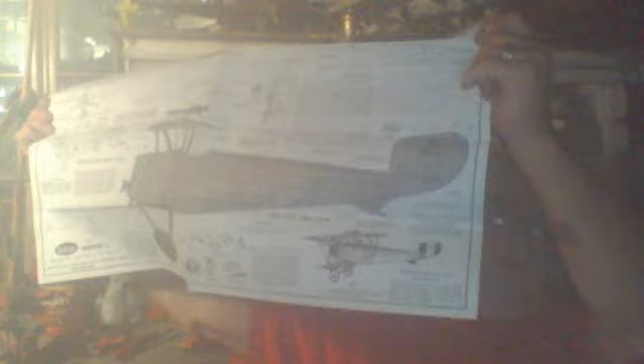Okay, starting out with the instructions. This airplane is a very big model—as you can see, most balsa wood kits are not small. The wingspan of this kit is 24 inches, the fuselage length is 22, and this is a Nieuport 11.

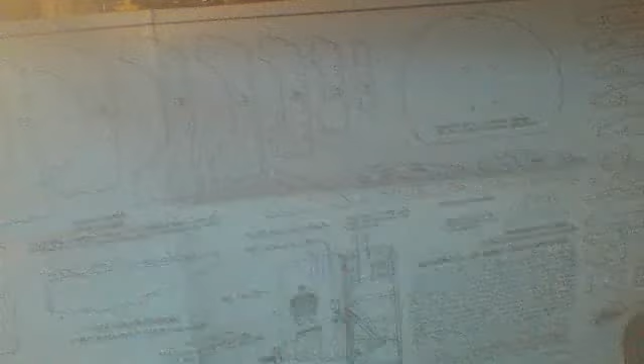I think the scale of this model is 1/12 scale. And on the plans right here, as I mentioned, as you look up here on the top, right across here—these are what I'm talking about. These are templates. If you snap apart or break apart some parts out of the kit, you can take this over here and transfer it over to a new piece of balsa wood, and you've got a new duplicate piece.

Also, there's another benefit to this too. If you decide you want to build a styrene model kit, this thing can be duplicated to styrene plastic if you select to do so. But since this is generally a balsa wood kit, we'll go along with the inbox review and the review of the instructions. So this side here is the finished part of the plan.

It tells you the color schedule of the plan, the do's and don'ts, and the techniques, like all balsa wood kits are nowadays. As you can see, all those templates right there, they're very useful, they're a must, and they're a godsend in these kits. Sure, you'll break apart and get frustrated sometimes, no harm done. All you gotta do is trace off the template on your printer-friendly paper and duplicate it over balsa wood. You're good to go, boys.

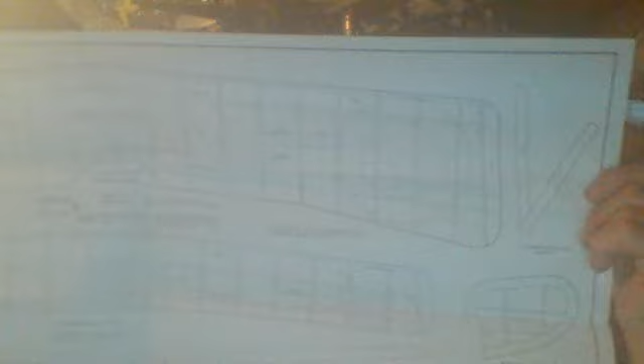On the reverse side of the plan is the construction plan. It has the layout of the wings, top and lower wing, also the fuselage laser sections, the tail sections, and the fuselage right here, as you can see, folks. You pin your wood over the fuselage using wax paper or any kind of clear paper, like saran wrap, to protect the plans.

So you want to save these plans. These plans are very resourceful and very useful to use. With styrene, if you decide to build a plastic model out of styrene, it's a challenge, or you can make a scratch build using these plans.

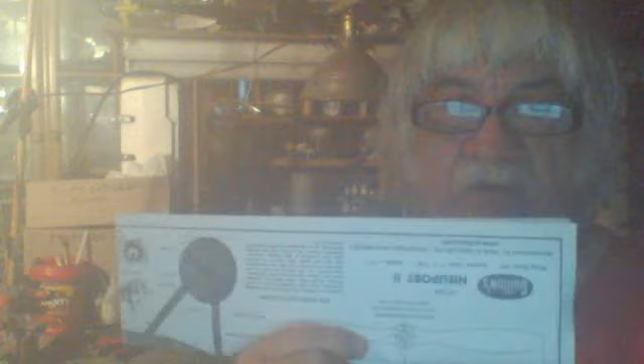This airplane was designed for optional purposes. At the era this airplane was designed, it was designed only for rubber power and U-control, utilizing an 020 engine, like a Cox 020. They're more or less for use in that category for power operation only, for U-control.

During the late 60s, they came out with this thing called the Galloping Ghost, a single-channel pulse unit. The rudder works like it pulses back and forth, so the plane flies in a pattern like this, because it's in free flight. You got no control of aileron, just rudder only. That was an art back in those days, so those days are gone.

But nowadays, the days of model technology have prevailed, and to the modeling community it's made the impossible possible. With the advent of electronics nowadays, you can take a model like this and make it a 4-channel airplane that can actually fly like a real machine.

They got servos out there, S-22 type, S-60 type servos, very small, about a little smaller than a postage stamp you'd put on your letterhead. These things are very ingenious and remarkable pieces of technologically electronic equipment. This stuff here is a modeler's delight.

It can be done for all kinds of things, model ships, model airplanes. I think kits like this, as I'm making an in-box review of right now, can actually fly 4-channel or all-electrical power, and boy, it's mind-boggling. But anyway, to make a long story short, this one is going to be rubber powered.

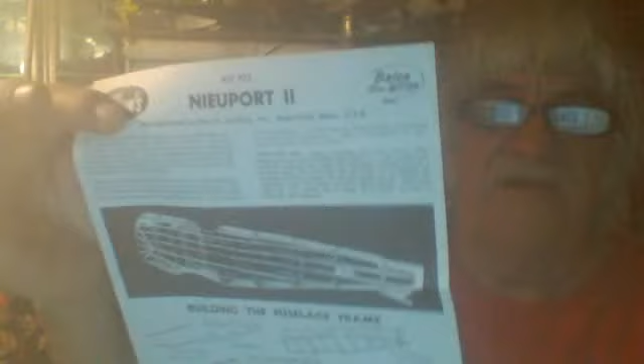And right here is your instruction booklet. For those of you who have difficulties reading plans, this tells you step-by-step instructions for the kit you're dealing with, the fuselage, the wings, and on the back, the final assembly. It also has tips on how to trim your airplane.

These planes must be trimmed. You can use them for free flight, because free flight airplanes follow pretty much the same principles as a plane piloted by radio control, so the plane has got to be trimmed. My trim on a free flight plane is just a hint of right rudder, and making sure the dihedral is the same with no twists or warps in the wings.

Make sure you have down thrust with a little left thrust involved. When you launch the airplane into the prevailing wind, the plane will have power to the left, and as the power recedes and dies off, the plane will have a right glide turn ratio. Every time it glides, it'll come closer to you, so there's no chasing involved. That's a tip on how you trim them, though there are all kinds of ways of trimming airplanes, folks.

There's 4 pieces that make up the tires. This kit has jigs you can buy, and you can use wire spokes, but I might do that for an ultimate challenge. It looks like Guillows is getting cheap again - instead of using plywood for the firewall if you want to use a glow engine, they give you some kind of plastic vinyl coating. I don't know what it is, but to me it's cheesy and cheap. Use plywood instead.